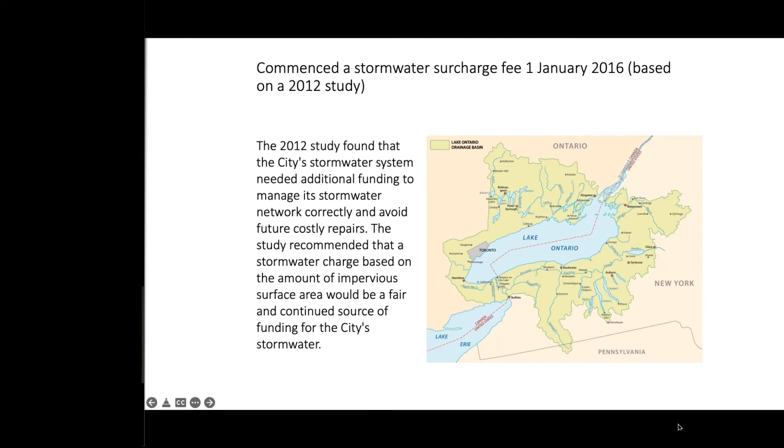So for Mississauga, really our journey to implementing a stormwater charge began in 2012 when we commissioned a stormwater feasibility study, which I'll talk about in just a little bit, to determine what the best way was for us to fund our stormwater system. We knew we had shortfalls in funding, we knew we had needs, but we needed to determine what the best way was forward. There are several different options to fund stormwater systems beyond just user fees, and so we wanted to look at that and be presented with options.

Now, we knew what the pressures were that were facing our stormwater system. So the big reason that we really looked to move towards a user fee model was because of flood management. We were certainly prone to both riverine flooding as well as urban flooding, and that was a really big issue for us.

We also knew that we were going to have to implement some really big infrastructure projects to deal with that flooding, and we also knew that because Mississauga was built out in a relatively short period of time, all of our infrastructure was aging at the same time. It was going to need renewal within a relatively short period of time. We had those ongoing operations and maintenance pressures, and that also included monitoring and enforcing our spills bylaw.

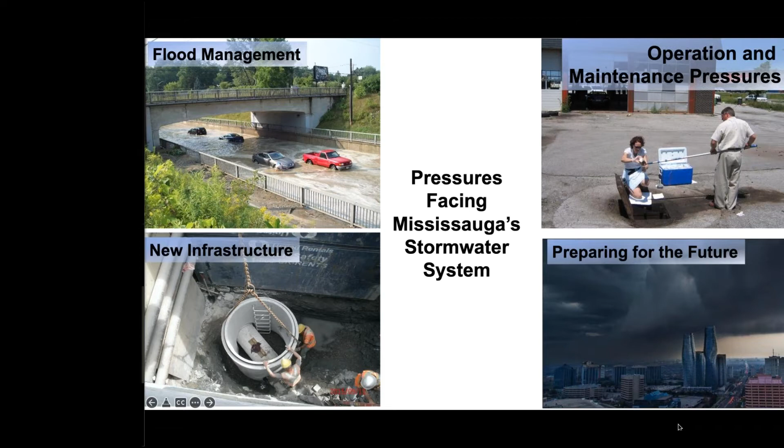And we also knew that we were experiencing more extreme storm events and flooding, and that we would continue to experience these, and this is something that we would have to prepare for. Next slide, please.

So what was the rationale for us to implement a stormwater user fee? So first off, it was a more fair distribution of cost among different types of properties. And fairness was really one of the guiding principles that we adopted in implementing the user fee. So previously, our stormwater system was funded through property taxes, which is based on the value of the property, but isn't really very indicative of the amount of pressure that a property places on the stormwater system.

We changed to a system, which I'll explain in a little bit, that was based more on impervious surface. So you can see here on the left, prior to that, when we were still funded through property taxes, the majority of funding came through residential properties, which are the majority by number of properties in Mississauga. However, those industrial, commercial and institutional properties, while they're the minority of properties by number, they're actually the majority of hard surface in Mississauga. So once we changed to a user fee model, there was a more fair redistribution of who pays. Next slide, please.

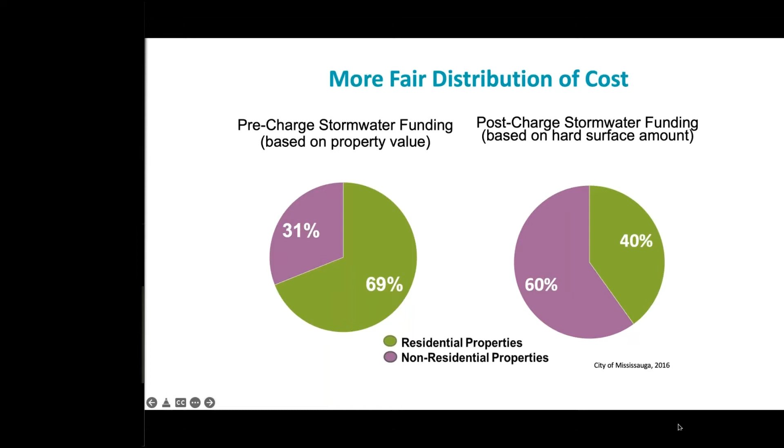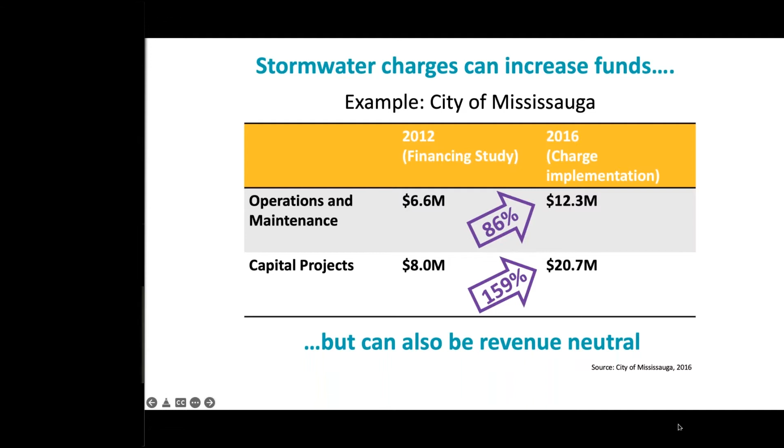One of our big desires was to also increase the amount of funding that we had. And so prior to the stormwater charge being implemented, we would be allocated anywhere from about $6 to $16 million Canadian a year to support our stormwater system, both in capital and operating costs. The first year that we implemented the charge, this went up to $33 million. So a really significant difference, and ultimately pretty transformative in what we were able to achieve. That said, some municipalities that I know have maintained more of a revenue neutral approach, which can be an option too.

Another big reason for us to implement this was to have a dedicated budget. So we have a stormwater rate that is reviewed annually as part of the city's budget process. It's subject to public debate, and council, our elected officials, our councillors and mayor, all debate it as well, just like they do the general budget. But we know that we have a dedicated amount that we can count on from year to year, which allows us to plan more sustainably. Next slide, please.

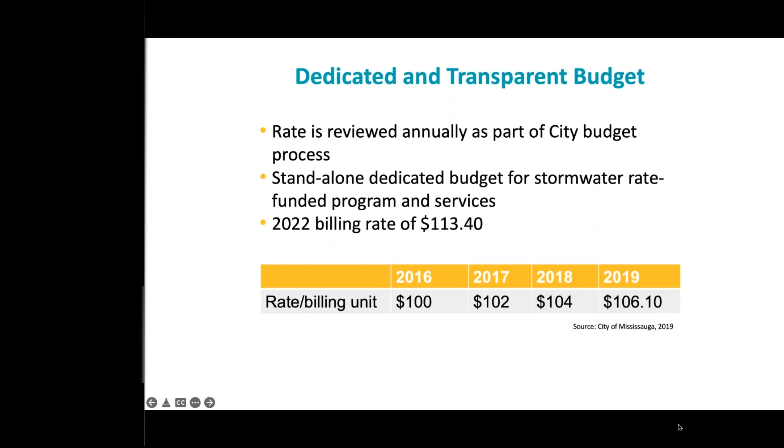So the process that we went through, I mentioned the stormwater feasibility study, and that's really a big first step that most Canadian municipalities undertake before they switch to a user fee structure. It can be relatively basic or much more detailed, but typically it will estimate what your shortfall is, provide a recommended approach, in this case, user fees to pay for that, and may even delve into some of the analysis that will inform your rate.

I mentioned some of our guiding principles, and so this was something that we really always try to adhere to. Transparency, and I'll show you some examples of what that looks like, fairness, and also consistency, so applying the same process to all types of properties.

We also struck an advisory committee composed of different stakeholders and major property owners to help guide us as we brought different parts of the user fee program to them, and we were able to sort of adjust that in an iterative way. We had public information centers to get feedback from the public, and we also assessed the resources we had in place when it came to staff, when it came to managing property-related data, when it came to billing, in order to determine what we had in place and what we would need, both to develop the charge, but also to operate it on an ongoing basis.

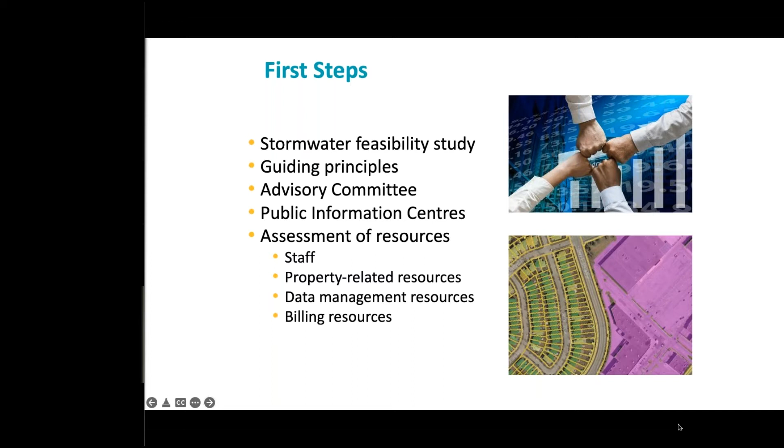A really important piece in developing our user fee was building internal consensus. So, we needed buy-in from our councillors and our mayor, as well as other municipal staff too. This was a very cross-divisional project that involved a lot of different teams, not just the stormwater team. So there's some different ways we did this, and a lot of this is how you frame the issue and frame the need for a user fee.

So obviously I had mentioned some of the pressures that Mississauga was facing, and this provided a really good opportunity to address these in the long term. While we weren't the first municipality in Canada to adopt a user fee system, we definitely did have a very publicized one, and it was relatively sophisticated in how it was approached. And so it really allowed us to position this as us taking a position of municipal leadership when it came to other cities in Canada.

At the same time, it is a proven funding solution that we've seen in Canada and also in the United States. So you're still walking a path that has been walked by many other towns and cities. And it was very helpful to find a council champion. So in this case, it was our mayor at the time who heard about this happening in another municipality and wanted to know why we weren't doing it. And so it was really great to have someone on council who could speak to the councillors and elected officials and to help pave the way. Next slide, please.

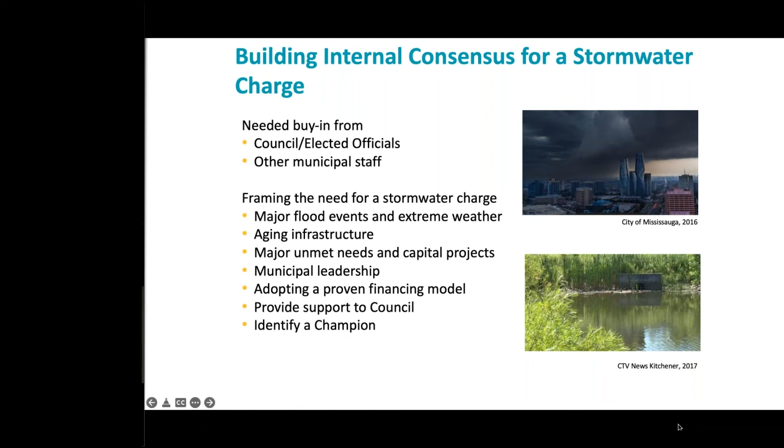So the model that we chose is the single family unit model. The way this is approached is we did a statistical sampling of 2,000 residential or single family properties in Mississauga, various different kinds. So detached homes, semi-detached homes, freehold townhouses, to determine the average amount of hard surface on the average residential property in Mississauga. And this amount of hard surface is called one single family unit, or SFU, of hard surface.

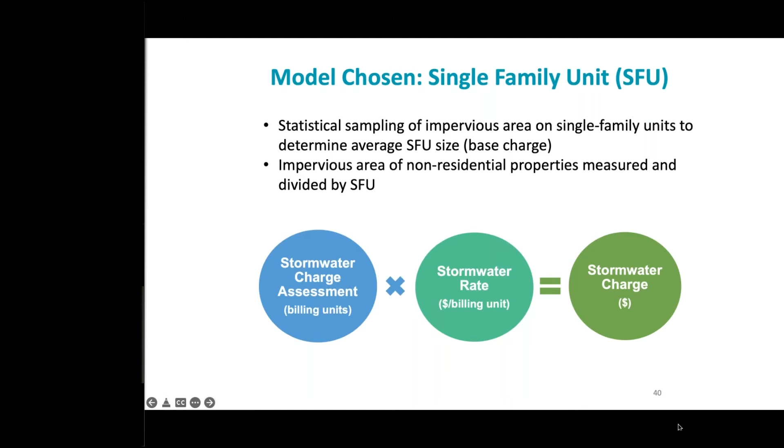And so the way essentially that we would determine the charge for a property, and I'll show you what that looks like for both residential and non-residential properties in a moment, is we would assess how many SFUs, or billing units if you will, of hard surface are on that property. We would multiply it by the stormwater rate for that particular year, and then you would get your stormwater charge for that property.

So for residential properties, we based the amount of hard surface expected to be seen on a property on roof area. And that's for two different reasons. We found while we were doing this analysis that there was a very good correlation, at least in Mississauga, between total roof area on a property and total hard surface, including also the driveways, the pathways, all of that. And also roof area was something that the city already mapped. And so this helped us to be a bit more efficient and reduce some of the administration.

So based on roof area, we determined the amount of billing units or SFUs of hard surface on a residential property. And residential properties were slotted into one of 5 tiers, ranging from the very smallest all the way to the very largest with the most roof area. And these charges that you see were from, I believe, last year, and this is an annual charge. So the very largest or highest roof area properties, which was really only, I think, the top 5% of residential properties, were charged a total of just over $180 per year for their stormwater charge. Next slide, please.

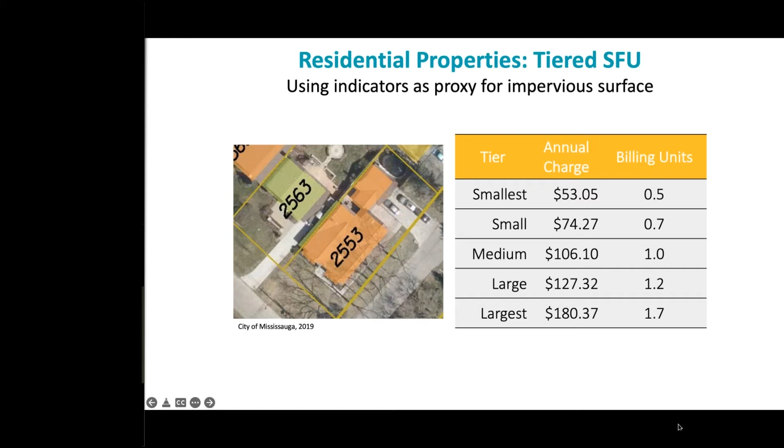Now, for those non-residential properties, for industrial and commercial and institutional properties, that roof area to hard surface ratio didn't really hold up. And so for each of these properties, we would map the total impervious area on each of them, and then we would divide that by the amount of square meters found in 1 billing unit or SFU of hard surface. So this was a much more individualized approach, but if you'll recall, these properties, while they're the minority of properties in Mississauga, have the majority of hard surface. So this is really worth that administration and that extra work to get it right.

And we had one assessment for each property, even if it was a condominium with maybe multiple units or an industrial property with multiple units, only one assessment per property.

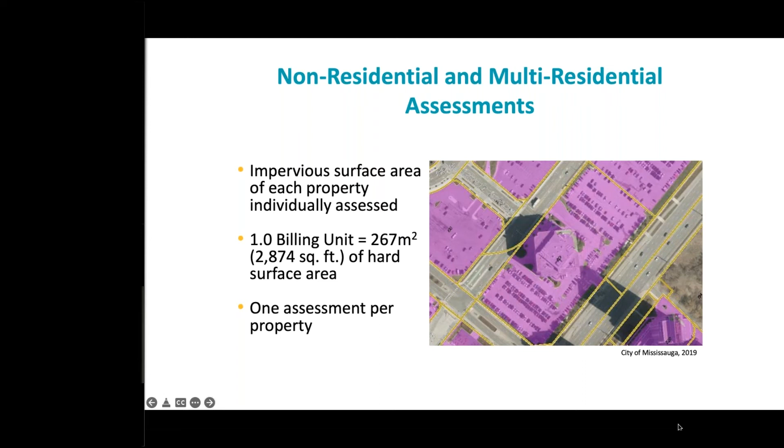So what did the billing look like? As Mary mentioned, it looked very similar to what you would see on your water wastewater bill. And in fact, we worked with the Region of Peel, which is sort of a different level of government who manages water wastewater, to have it appear on their bill. So if you were a resident in Mississauga, you would see one line for your water charges for the quarter, one line for your wastewater charges, and then one line for your stormwater charges.

So the majority of properties receive their bill on a quarterly basis, with those really high water users receiving them on a monthly basis. And then, as I mentioned, when you have a property where there might be multiple units that have separate water bills, you would still only have one stormwater bill for that property, and then it would be up to the property owner or the property manager to divide that up appropriately.

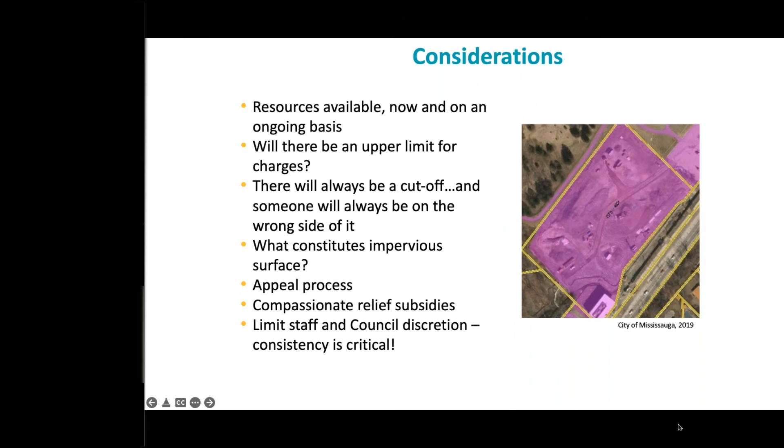We also implemented various outreach tools for the launch of the stormwater charge. So I'd mentioned our advisory committees. We had a variety of web resources. We did in-person engagement. This was obviously all pre-COVID. We did mail outs to every property in Mississauga.

But we also had, and this was really useful, an online stormwater charge estimator, where you could type in your address and you could see what your annual stormwater charge would be. You would see the mapped aerial imagery that we used. And so that helped, I think, people to sort of avoid some surprises. But you could also type in, let's say, your next door neighbor's address. You could type in the address of the mall down the street.

And so in this particular case, certainly, sometimes we got phone calls from people who were asking why they were paying more than their next door neighbor. But at the same time, this was really part of our transparency approach, where we really wanted to be open about what our stormwater charge was and how it is calculated.

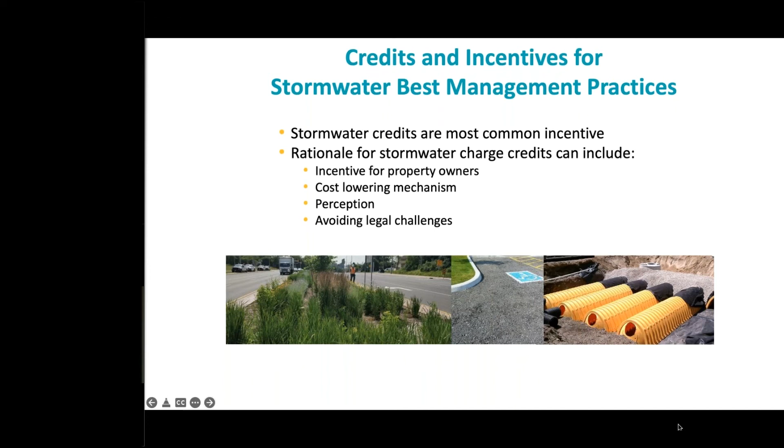So Mississauga's stormwater credit program is based on 4 different categories. Different best management practices fall into different categories, and you get up to a maximum of a certain percentage in each category. Some best management practices might fall into more than one category, so you are allowed to double dip, if you will. But the total credit that you can receive is 50% off your stormwater charge. And again, this is for those institutional, commercial, industrial properties.

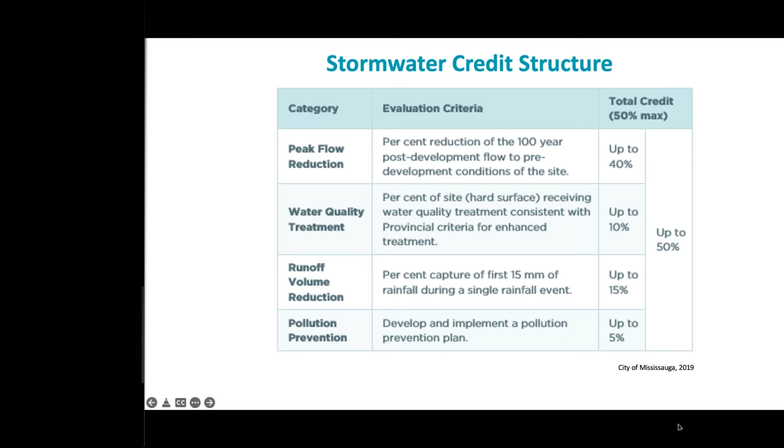So we learned a lot of lessons from the implementation of our credit program. They are very important to offer, again, so that there is at least an option for those properties with the really high stormwater charges to decrease their charge. At the same time, we found, and I know many other Canadian cities have also found this, that sometimes credit programs have relatively low uptake.

We found that uptake tended to be more from existing best management practices on properties that had already implemented them. And this is not necessarily surprising because property owners won't necessarily rip up a perfectly good asphalt parking lot and turn it into permeable pavement right off the bat. But the hope is, as they are retrofitting over time, that this will be an option that they're going to consider when the opportunity arises.

That said, we do find that those property owners do need a lot of support when it comes to guidance, when it comes to understanding options, in order to surmount some of the barriers to implementing best management practices and getting into that credit process.

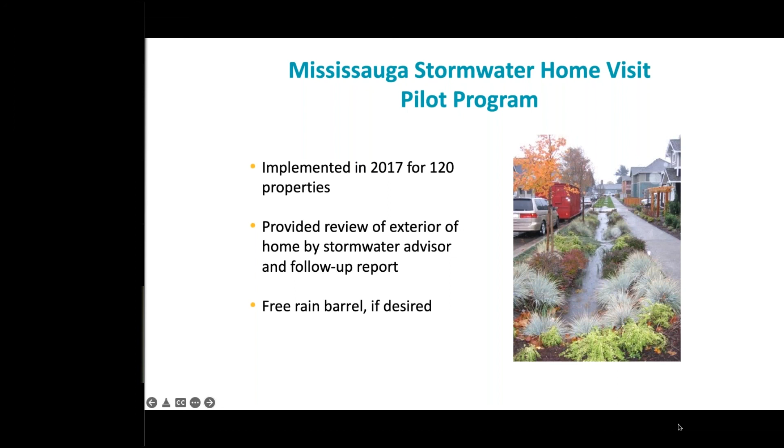So just to finish up, what do some of these outcomes from implementing a user fee for Mississauga look like? So as I mentioned, our initial motivation was really quantity control and flooding. And so since the implementation of the stormwater charge, we've been able to implement some really significant stormwater quantity control infrastructure that includes various underground storage galleries. We've done a lot of sediment removal from stormwater management ponds, extending their lives, and we've undertaken environmental assessments for major capital projects related to riverine flooding.

We've also increased our focus on low impact development. So bioswales, rain gardens, permeable pavement, and those kinds of options as well. And we have also implemented a pipe renewal reserve, knowing again that our storm sewers are all aging at about the same time. We began with very modest deposits into the pipe renewal reserve, and it's currently valued at about 30 million this year. Next slide, please.

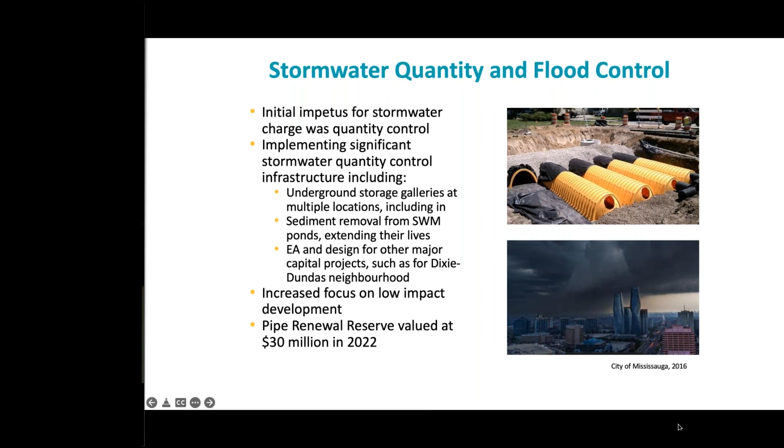But one of the great things about implementing the user fee is that it allowed us to increasingly focus on water quality and also on asset management as well. So Mississauga is nearing completion of a stormwater asset management planning process. This is required now through provincial legislation, but at the same time, its funding has allowed us to really do a good job of that.

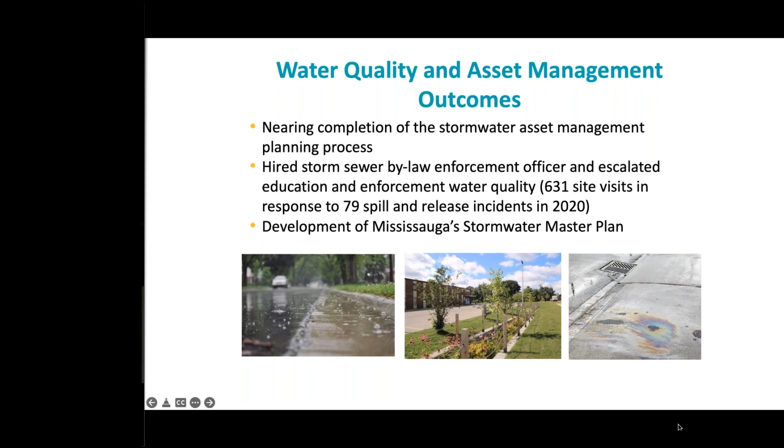Mississauga also hired a storm sewer bylaw enforcement officer, and was able to escalate education and enforcement when it came to water quality at industrial properties. And the city is also developing a stormwater master plan as well.